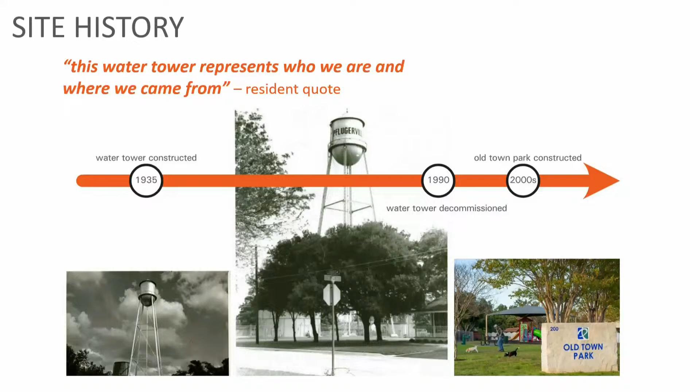So I'm gonna let Jeff talk about the public engagement process and ultimately introduce our team. Yeah, so kind of talking about that history a little bit more, this is something that's incredibly important to people as a landmark, but not necessarily as a place. And so that was the whole goal here, to try to re-envision what this space can be, to have that placemaking opportunity for the community. And to do that, we had to engage the public and make sure that we're on the right track and seeing what they wanted out of this.

And in keeping with City of Pflugerville tradition, our public engagement process was pretty robust. To start things off, if you saw us out at any of our events or engagement, we made a mini water tower for this, which is in that photo there. It was absolutely the draw to our table. Deutschen Pfest, Rock the Block, we had people walking up to take photos with that, and then they got curious about what we were doing there. We did have some offers to purchase that water tower, so we'll auction that off after this is over.

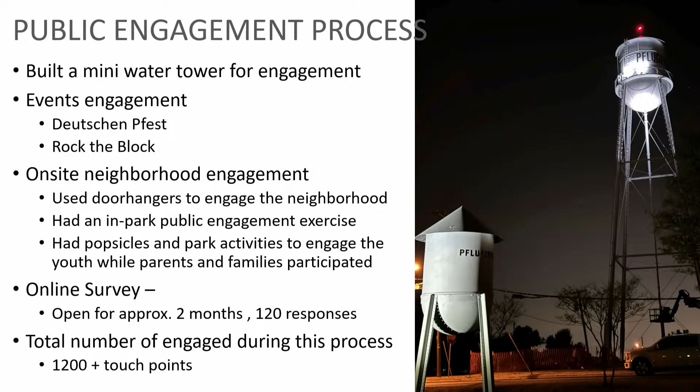One of the things we did was allow them to give feedback on park design options. I think it's really good in a process like this to not just talk abstract, but to actually talk about what we're thinking about here. We've said multiple times that we want this to be a transformative and innovative space, not just a playground replacement — we didn't want them to think about it that way. We wanted them to think a little outside the box. So our design team provided them with several local examples that people may be familiar with, have visited, have seen, that aren't just a typical run-of-the-mill playground you might see at parks across every city in the country.

Three of those we discussed with the public were Kingsbury Commons at Pease Park, which a lot of people are familiar with, especially in the Austin area — it's an iconic landmark for Austin. Then Alliance Children's Garden, which families across Austin will travel 40 minutes to visit. That's an incredible place; I'll take my son there and have to peel him away every time I go. And then Skyline Park at Easton Park, a newer development in Southeast Austin. What was really special was that Alliance Children's Garden and Skyline Park were both designed by TBG, who we have on this project, so they were able to talk about these projects in depth with folks.

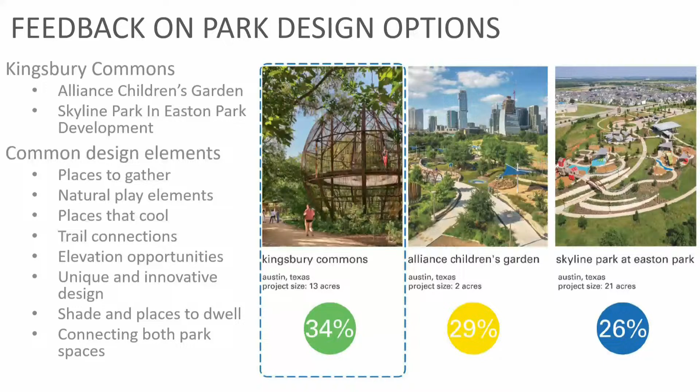One of the important things to note on this project is that there's a street that bisects these two parcels. So we wanted to make sure we were engaging with folks about what they'd like to see with that street — whether it's just enhancing the pedestrian crossing, or actually incorporating that into the project and closing the street off. Most people said they wanted to close that street off and increase the amount of acreage on this already pretty small piece of property.

That's all well and good if it's people across the city saying that, but that was the same thing we heard at the on-site engagement as well. That neighborhood is the older neighborhood, built on a grid, so it wouldn't create much of a traffic hindrance. We heard from folks who live directly adjacent to this park, and they felt the same way — they thought this place was going to be something special, that it really needed that connection between these two parcels. So that's going to be incorporated into the design. You'll see that here shortly.

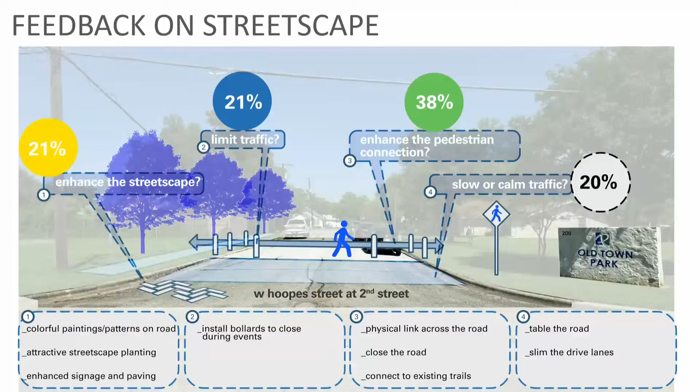So we really saw, going back to the engagement in person, we were engaging with Pflugerville community members. The folks who responded to this survey are also Pflugerville community members, and a lot of them are really close to this park.

Yes, sir. If you live in Pflugerville and you're more than 5 miles from that park, where are you? Maybe that might be the small portion that aren't in Pflugerville. Could be north, could be northeast, maybe Black Hawk or Falcon Pointe, depending on traffic. This could be their reference point, they might think they're more than 5 miles, but they're really not.

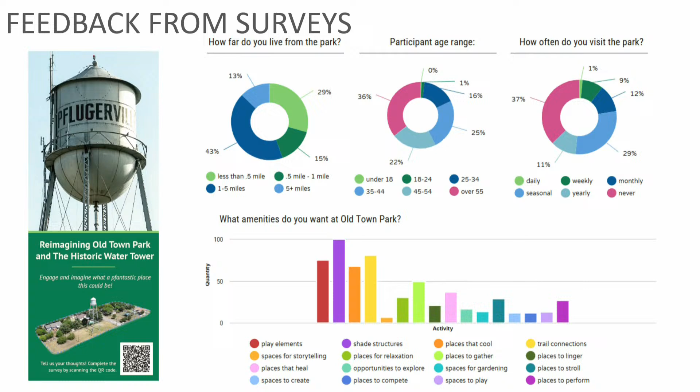Throughout that process, we gave them real world examples, but we also talked big picture about what sort of abstract ideas they want to see in this park. This will come as a surprise to nobody in Pflugerville, but the top 4 things they wanted to see are play elements, shade structures, places that cool, and trail connections. Shade and trail we kind of figured would be in here, but play elements and places that cool were really important to people as well.

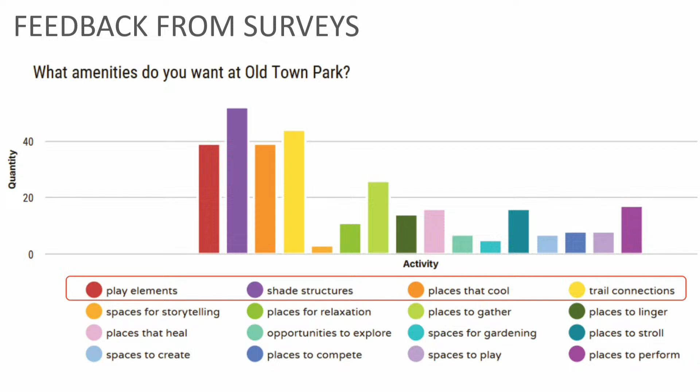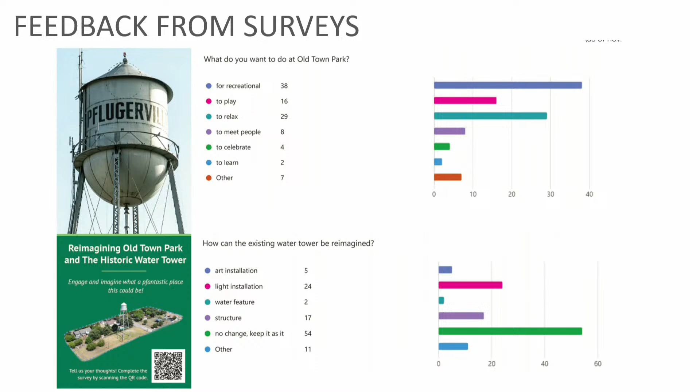Did anybody reimagine it being moved somewhere else? Yeah, we did have some people talk about moving it. No ideas on where to move it, just the idea of maybe moving it. Well, I have some. We'll send you the link.

So before I kick it over to our design team, I did want to say Old Town Park itself, as you saw in that survey response, doesn't get a lot of love. We even had some respondents at our on-site engagement say they live right next door to this park but go to Moose Park instead, which is a 10 to 20 minute walk from where they live. So we definitely need to do something there to re-engage that community, and it's a really important community, Pflugerville.

So just to give you a preview, here's an overview of the master plan. If you go from right to left, there are 3 major areas. The first is about access—where does the water come from? It's the Colorado River, it's Lake Pflugerville. And then how does the water get from there to a place where you can use it? So it's all about the transport, the distribution.

That's where the water tower starts to help people understand not only what it is, but how it works. And then finally, we bring in a bit of sustainability and conservation about what do you do to be good stewards of water. How do we collect it? How do we filter it? And how do we put it back into the water system?

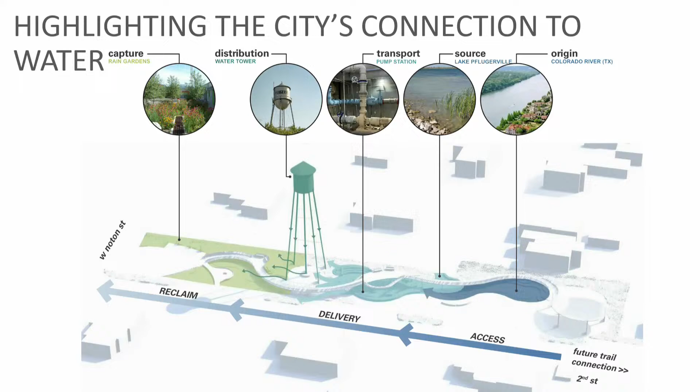Taking that same overlay, we really wanted to define the user experience and how they could see themselves in the space, transcending from active to passive spaces, so that there's a nice transition period. We're not having people try to sit and relax next to where a large amount of people would congregate, or where there would be loud activities with children playing.

So our social activities really hinge on the right side of the park with a pavilion and a large lawn. And as they transcend through playing and explorative play, the resting spot becomes part of the water tower itself. And then really the passive part becomes the discovery area where the rain gardens occur, as well as a few resting points on the left side of the project. So really creating a transect for socialization.

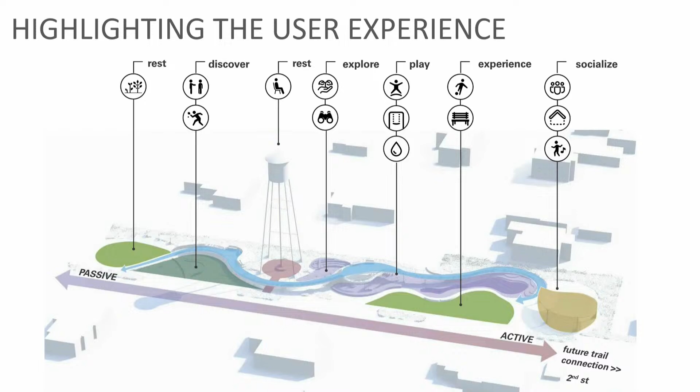We're going to walk through a series of diagrams that show how we built the park up with the different program items we heard through community engagement. So this is the final graphic, but we're going to take it all back to what would we consider the iconic features of the site itself. The water tower is the big red focal point feature in the middle of the site.

And to create a balance, we wanted to bring new structures on each portion of it. On the left side, new structures that would be more focused for smaller group sitting areas to provide shade for a wine night for a couple, a small gathering, a mother-son moment. And then on the right side would be the larger pavilion with restroom structures where a movie night could occur, or a local band or a festival could spill out and have shade pieces. So trying to provide anchors, but not sit them next to the water tower so we can keep those long distance views to it.

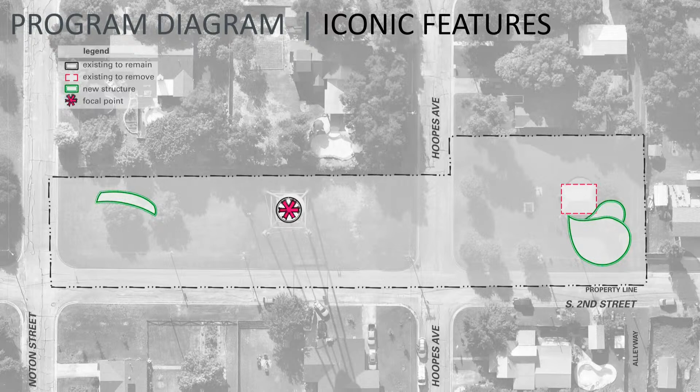Overlaying on that is our circulation and connectivity diagram. So looking at where we want sidewalks along streets that don't currently exist, especially along South 2nd Street. And then, it is the trail capital of the world, so what would be best but a long meandering path

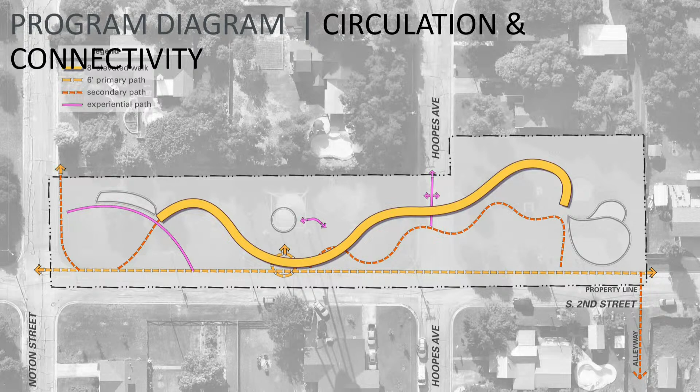that leads you through all of these different exploration zones. It bows out at the water tower, still recognizing the water tower itself and giving room to breathe, and then crosses over Hoopes Avenue, which you'll see in all these diagrams has now been taken over and given back to those park spaces. And then a few series of other experiential or secondary pathways that help lead between some of the larger program items.

The program items show in some bubble diagrams in some spaces. So going again from left to right, the 3 small seating nodes that occur under the shade structure itself. And then really the 2 dots that hinge on the beginning of the trail and head up towards the water tower itself. We pulled the play, multi-generational play, to really be adjacent to the water tower itself, to help activate that middle core of the park, not putting it on each end.

And it transcends and dives into the water feature, splash pad area, that then takes it and ends towards the pavilion. So we're trying to pull and spread these pieces out across the site and not put them all in one area.

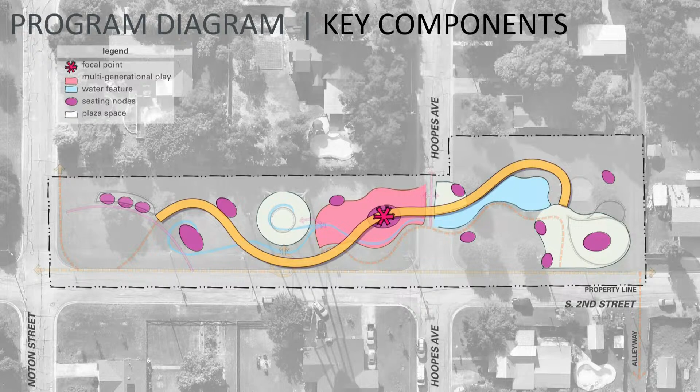Oh, here we go again.

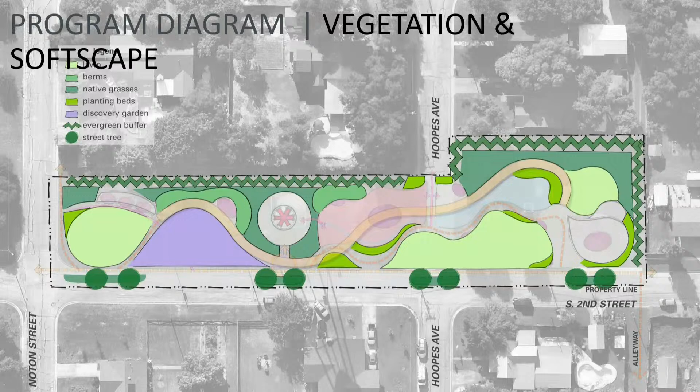How high are those berms planned to be? We haven't gotten into detail grading, but honestly, 6 to 8 feet. I think the evergreen shrubs, the buffer, I would make those 10 to 12 feet to really help block it. We know we're elevating people up on that pathway, so we don't want the looky-loos over people's backyards.

And then when you pull those all together, the framework starts to step up, and this looks like colored bubble plans. So we have a series of other graphics that show it in a more realistic nature and can walk you through the spaces.

But through here, you'll see the meandering pathway, and we have additional diagrams that would show how that pathway meanders both from the ground level plane, gets folks up above at a different elevation, and then has integrated play throughout the entirety of the park here.

If we go with this, I would possibly suggest making Second Street a one-way. I don't know, it just looks cluttered if it's two-way. What do you think? I think it's a pretty wide right-of-way. Do you know what the right-of-way is there?

It's very wide. We have a road diagram, a road section that's later on at the very end. Right now it's that full pavement width, but we want to create bump-outs so they become protected parking spaces. And by giving it a little bit of that road diet, we start to pull the parking out of the park space as well. We don't want to lose available programming area for parking.

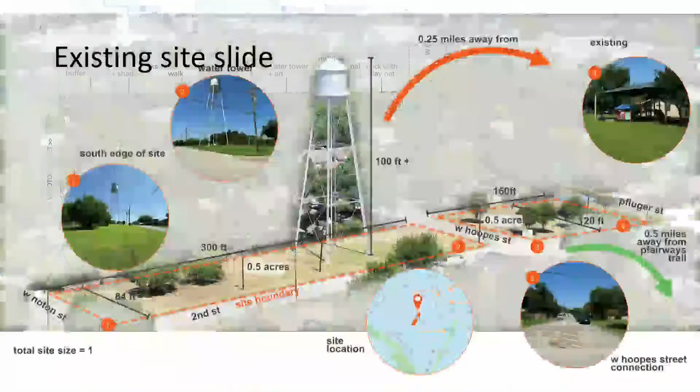Well, I think part of it will be what the play elements are, and I think that'll be a big draw. So if we keep going, let's do it. So this is the existing site right here. Your question of what the size is, it's closer to an acre.

Right here you'll see 2nd Street. We'll get further along and show that road diet and how wide that road actually is. You can see the existing playground here that's about 20 years old. I believe 18 other playgrounds have been replaced in advance of this one. There is shade, which is fantastic, but not a lot of folks play on this playground because of how outdated it is. In survey responses, folks who even live within a half a mile have never even visited this park or didn't even realize it was a park. Even the parcel with the water tower, folks didn't realize that was part of the park.

Well, it's also a 2 to 5 year old playscape, so it's very limited in use. I think that's probably the major reason, maybe there's not as many people with kids in that age group. I will say anecdotally, this is just one person, but the family we talked to said they went to Moose Park, and she had a 4-year-old with her.

Instead, the Moose Park one has 2 swings and a lot more great things to do, more variety. And she lived in that house, in walking distance, which was so unfortunate — instead of having a nicer park here that she could more easily access with her children, she chooses to get in the car. So there's such a great opportunity for folks that live in this neighborhood.

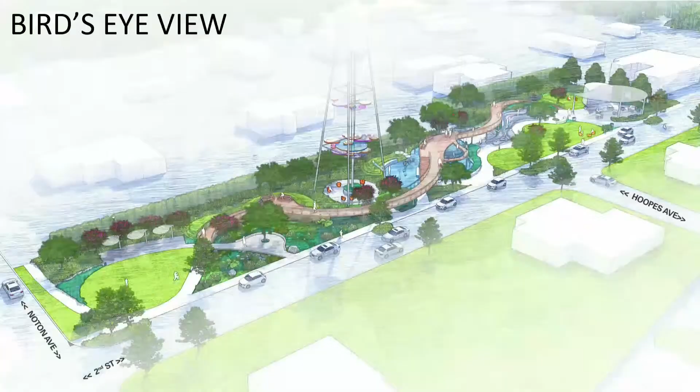So here's that bird's eye view that I think helps articulate some of the questions raised. The road diet, we'll get to that. But our pathway, the meandering pathway, gets folks interacted with the water tower, which was one of our goals, also telling the story of water as we interact with different elevations, artwork with the water tower, and allow folks to meander through this space. Additionally, it provides essentially more acreage to the park as you're getting folks up to a different elevation, while there's additional activities and engagement that can happen underneath the boardwalk as shown.

I think that the picture answers my question, but I would just want to verify that meandering pathway there is ADA compliant. Absolutely, yes. That's a standard moving forward, because the law requires it.

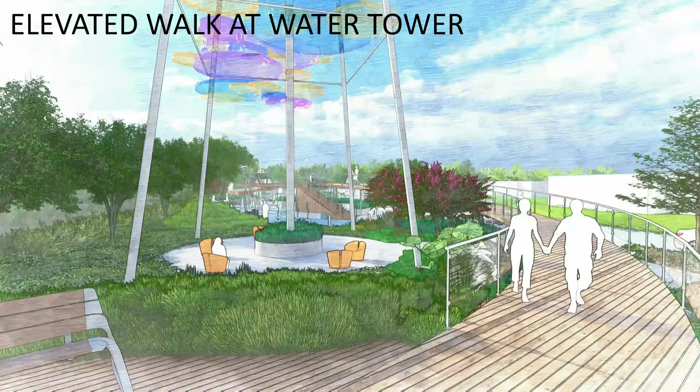And so keep going, you'll see the artwork integrated with the water tower. Again, not a detailed design, but a great opportunity for folks in the city of Pflugerville to engage with the water tower, to continue to articulate and enforce that this is an iconic structure to the citizens of Pflugerville.

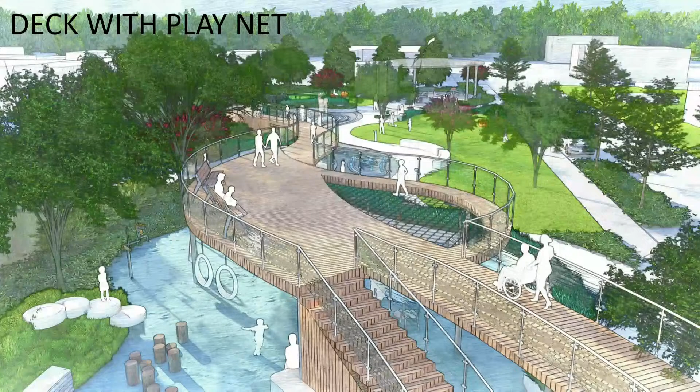Here's another great image here, articulating your question. You can see someone here in a wheelchair. This would be compliant to code. Certainly there is a staircase, but we would comply with all ADA requirements for play here.

You'll see this cargo net. Again, we're designing for multi-generational play, not just kids 2 to 5 years in age, but that older demographic that lives in the neighborhood, and future generations moving to Pflugerville or drawn to this park. You see there are swings here, adding play value at different spaces and elevations where possible. Those swings would be attached and affixed to the underside of the walkway. The cargo netting can be used from above and below, with additional play features down below as well.

Here's a great shot from under the bridge, articulating and showing those swings. Again, not just for kids, but for adults as well. Adults love to play. Additionally, you can see lighting underneath, different artwork illuminating in this daytime shot, and we'll get to some nighttime shots here as well. But opportunities for play all over this structure.

And you'll notice we're providing a series of different places to seat, some benches with backs, some walls that are built in, some movable tables and chairs, maybe under the pavilion, just as we know people like to experience and sit and congregate in many different means.

You'll see the view from the shade structure looking back at the water tower, and then in the foreground here, the middle foreground to the right, the water feature here as well.

You'll see what looks like a guitarist here right off of the table, so opportunities for folks to bring in a band. Elvis impersonators. Yes, exactly.

Have events, and so that's where those parking spots come into play, or even a smaller birthday party. This is just a wholesome, right-sized park for a child or even an adult to have a birthday party here and hang out. Here's another bird's eye view.

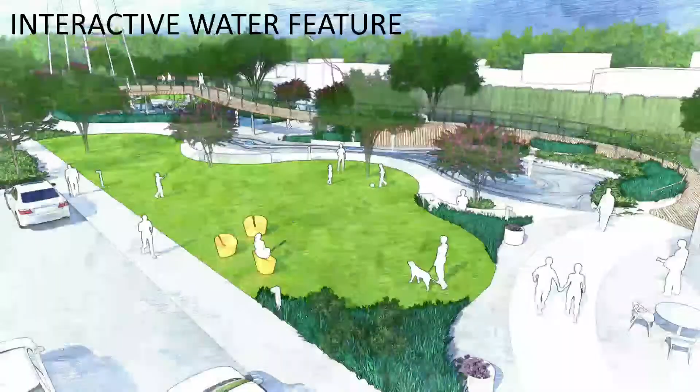Again, you can see the parallel parking spaces. Again, a great opportunity for the snow cones, getting those teenagers outside, getting that vitamin D here at the park. And then, again, the water feature meandering through just immediately adjacent to the bridge structure. And then that nighttime shot as well.

Here is a great street view. Again, the road right now, I don't have the dimension off the top of my head, but if you look in Google Earth or if you go out to the site, there is no centerline striping. That road needs to be restriped. It is wide enough to have two-way street and parallel parking there. So right now it is almost a highway for cars.

Having a road diet and reducing that down, having the parallel parking spaces would help reduce the speed as folks go through this neighborhood. When we were out there for all the events, it was not a high traffic street whatsoever. I think other folks were super interested in closing the street down because it's on the grid. If it looks busy, you can just go around the block, no big deal.

Reducing that down again to have that parallel parking, that 22-foot travel lane. So right now, the road's even wider than that for two ways of traffic. I would never have guessed that. But it's huge. With that concept, with the parallel parking dedicated on one side, would the other side of the street need to be modified to no parking?

No parking. That would, yeah. Yes. Which would front residential too. They would, that'd be their preference. They would appreciate that. Yeah. Absolutely. Well, I know quite a few folks do parallel park on that side of the street currently. I don't know why, you're outside their houses.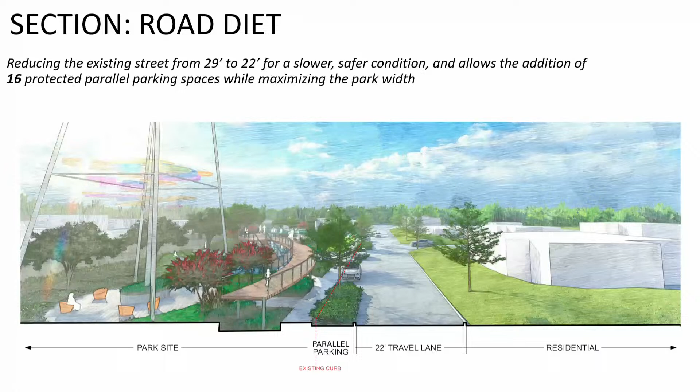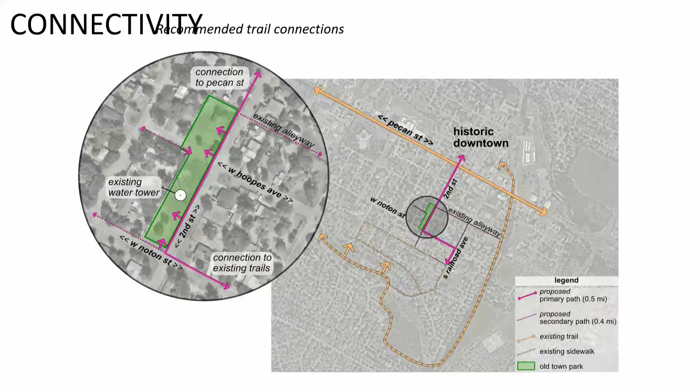And there's not a lot of walkways, so folks, when we were out there that night, when they're walking their dog or whatever, they're on the street. So this would also be an opportunity to expand connectivity from this space out and then just generally in that neighborhood, giving them other opportunities, especially as we see development happens around Pecan.

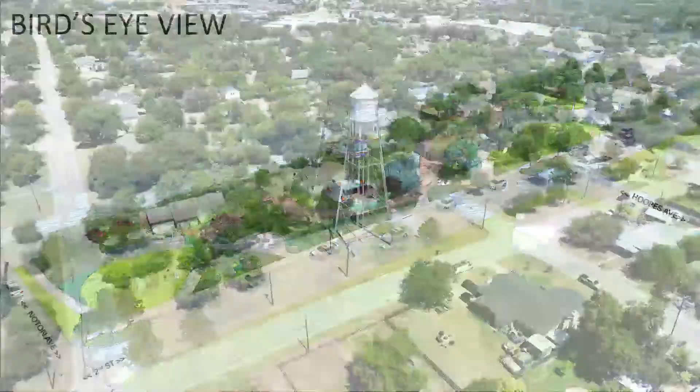Can you do me a favor, go back several slides to one of the bird's eye views of more of the layout, maybe the bubble map, I think it was. Oh, the bubble plan? Sure. Perhaps somewhere in that area. Sorry to take you back so far. Oh, no, you're fine. Now that I know how to work this, we're totally fine. There you go. There's another one on the other.

Not necessarily all the way up, but just to align with the northern portion. Oh, so why not? I think we could. Yeah, I don't think we thought some about that. I just kind of see it stopped up there in the renderings, and some I see it here. So I'm just trying to make sure we've got alignment on that.

We could totally take it from the one that's bumped up further back and down. I think we were just like, oh gosh, we're closing a road, maybe we need to be a little more conservative to do so. Let me hear your thoughts on that.

I don't think there's any implications to driveways or anything if we take it across. I think it's better to enlarge the park, close the road, and reduce the pavement as well. Take as much as you can if it doesn't impede.

It doesn't affect that home. That's a side home lot condition on Hoopes, and then the one that fronts is the one on the plan right side.

I think when we were brainstorming it, we were just trying to, maybe knowing that some people may park on that side, just get them further away from that residential spot. If you go closer to their property, you're almost forcing people to park right in front of them.

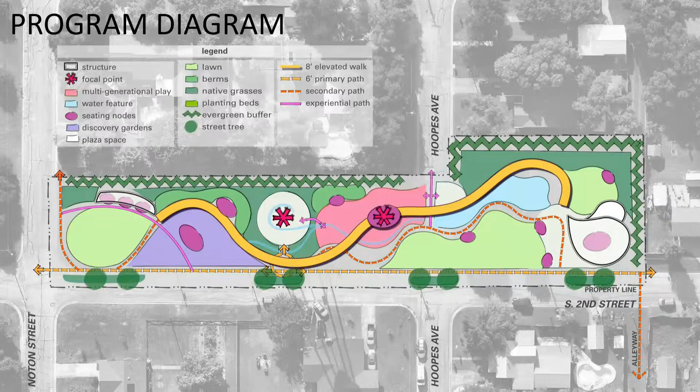All right, I got one other crazy question for you. I think Shane, this is probably more for you. Looking at the scope of this park, I'm going to say it does not necessarily look inexpensive. What's our plan? Is this something that goes into CIP, is this something that goes to GO bonds,

or is this something we're looking to fund through developer contributions and other sources? I think it's been tough to project right now. There's been some tariff and other implications that are making what we'd project be higher than we'd love to see. I think right now you could see this at full build out potentially over $5 million, but there would also be some burying of lines that we would use a different funding source for, like some road fees, some sidewalk fees from burying of lines.

We have this on the CIP. Once we have parking and a restroom, it potentially would qualify for parkland dedication funds, which would open it up to some funding. And we believe this will be a phased build out.

How many phases? Yeah, that was my question as well. I think 2 to 3 is what we've talked about, depending on how big of a first phase is funded.

The reason I asked is because we just had a lunch and learn and got some preliminary results from our citizens who were talking about us pushing forward: how do you uniquely identify Pflugerville? What makes people not just want to live here, but actually want to stay here? And I think something like this is unique — it marries what our past is with our future, and accents in a lot of ways what we're trying to do moving forward in the city.